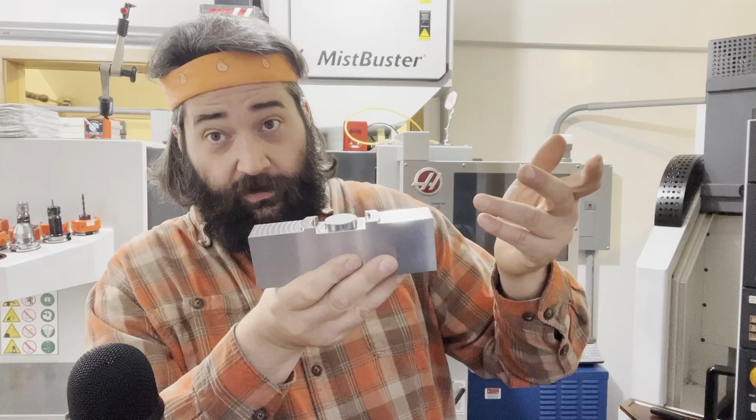So you might ask, what is a shallow diameter? It could be an inside or an outside diameter, but the core theme is the length of the diameter's land is too short to measure traditionally. So this outside diameter with its 100th thou length can't be measured with a traditional micrometer.

And you say, well, a caliper could get on there. Yeah, but if you're trying to hold seal fits or bearing fits, a caliper really isn't what you want to be using. And then on this inside diameter, there's an embossment preventing something like a traditional plug gauge from being used. So a shallow diameter gauge can measure all three of these diameters, no problem.

And it can also do some things you wouldn't think about, like tapers. It can measure face and taper contacts, like on a lathe chuck. It can do grooves, both face grooves and OD grooves, and it can do all kinds of lengths - really a very universal type of gauging, and I wouldn't want to be without one.

So I hope you get something from this video. Let me know. So here is the gauge I drew my inspiration from.

This is a Federal shallow diameter gauge. They're no longer in production, but my past employers and I have all liked these so much, I've actually made quite a few reproductions of these.

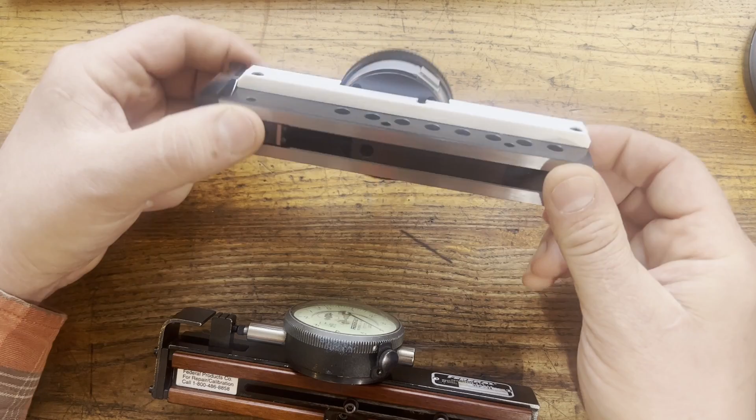One of the things I've discovered is that this slot that runs the length is a liability in terms of getting this bottom plane flat. So when I made mine, I got away from the slot, and instead I have a through hole with a tapped hole on the opposite side, and then the carriage is slotted. So the carriage can still be adjusted, and then you just tighten the screw to locate it.

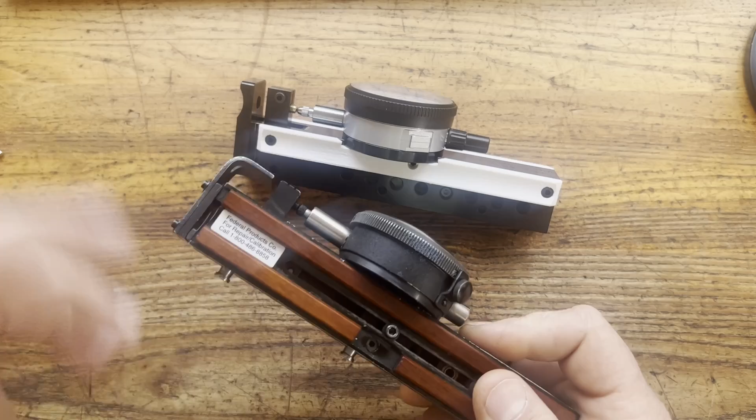My other issue with it is the carriage floats a little bit when you go to lock it up, and it can make setting the probe depth a little challenging if you need to hold a very specific depth. Sometimes you might have a counterbore as shallow as a millimeter, and so if your carriage is floating around half a millimeter, that could be a little frustrating.

And then my final issue with it is it takes 2 Allen wrenches to both adjust the carriage and the probe height. So on mine, I unified everything to one 2.5 millimeter Allen wrench that handles all the adjustments for the entire system.

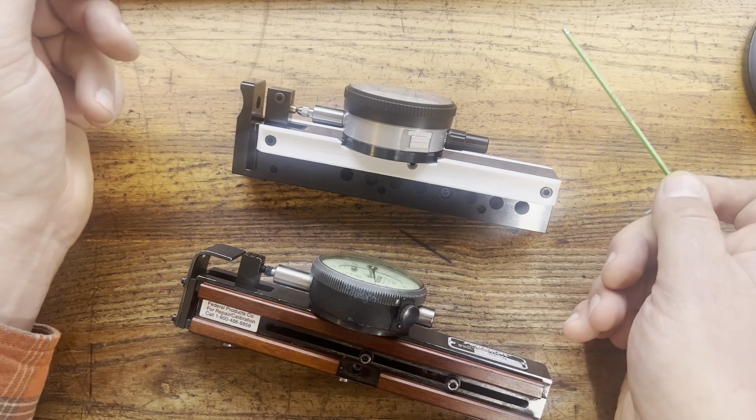Otherwise, it's just a few DFM things. Instead of a stack up of 3 basic plates, I went with one more complex one. With the advent of CNC, lower, more complex part quantities I find to be easier and cheaper than lots of little simple parts. But it really kind of depends on your shop - if you're a manual shop, maybe this makes more sense.

But yeah, otherwise, very loosely inspired. Another thing I changed - instead of the wood insulator grips, I just 3D printed them, and if anything, the hollow infill nature of 3D prints makes for a pretty good insulator. On top of that, I think it looks pretty sharp too.

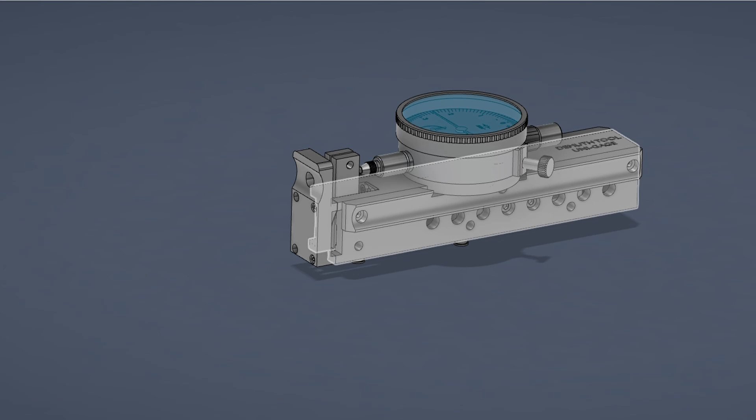This is the CAD model for the gauge. We're going to take a look at each piece and briefly see how we manufactured them. We're going to start with the main frame of the gauge. So if we take a look, it's pretty prismatic, just a lot of holes, and then the only thing of note is this T-slot. We did have to hard cut that feature, and hard cutting T-slots is a little tricky, but it works well enough.

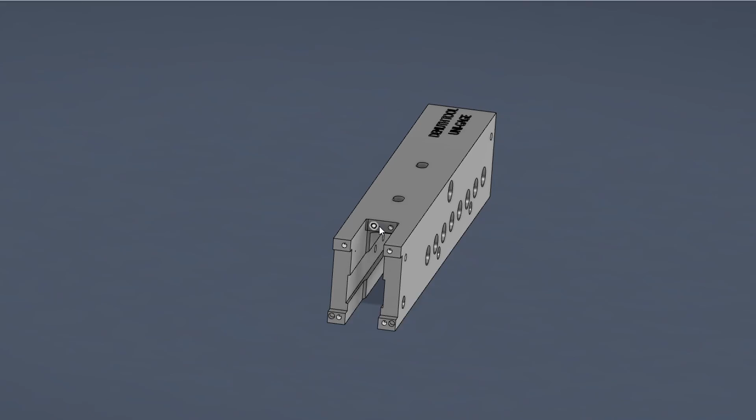The only design for manufacturing issue I had is this M2 screw hole, which was too deep for my traditional thread milling solution that I used on the top M2s. So I did have to hand tap that one. Otherwise, pretty straightforward. I gloss over the grinding of it because we established in past videos how to grind things flat and parallel, and so I just really wanted to quickly focus on the hard milling and things you can do, like try to avoid deep holes like this.

This is the M2 tap I was talking about, having to hand tap. Had I got this from a customer's engineer, I'd complain all week, but since I designed it, it wasn't that bad.

Just a quick look at grinding this up - again, just kind of wanted to gloss over it. I used the same technique I used for the thin V block. This is the hard milling. I had to do it in the Haas since it is slightly too long for the Mori, but I'm using a step down technique with a back tapered end mill. And so even a machine like the Haas can still deliver pretty good results because the cutting pressure is so uniform.

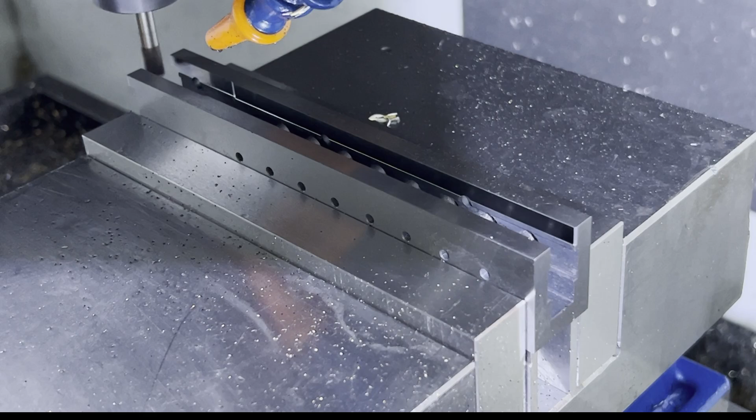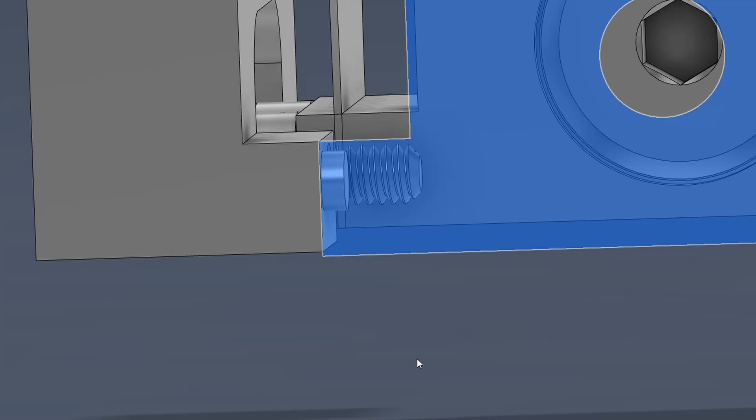For the gauge frame, some of the fits we have to be cognizant of is we don't want this end cap floating around and sitting lower than the bottom face. So how we prevent that and keep this slightly above is we hard milled two 2mm dowel holes into the frame, and then on the end cap we have two 2mm posts, which are H7 and fit into that dowel hole.

That just keeps everything aligned. Some of the other fits we have to worry about is we don't want this flexure spring here being out of perpendicular to the face of the part. So how we keep everything nice and squared up is on the frame, we have a slight slot that the flexure spring sits in, and it just slip fits into there, and that keeps everything aligned pretty accurately.

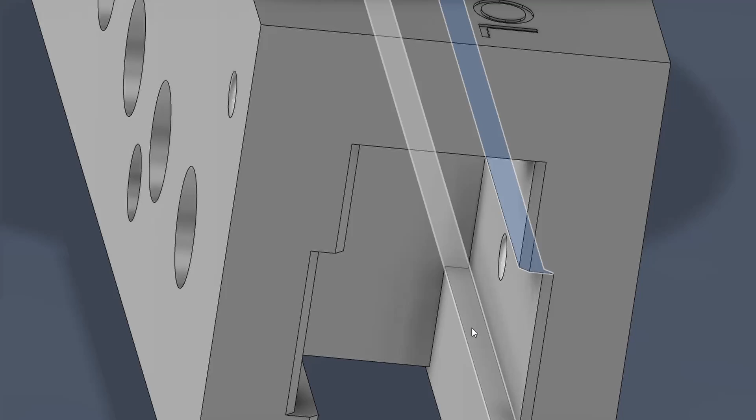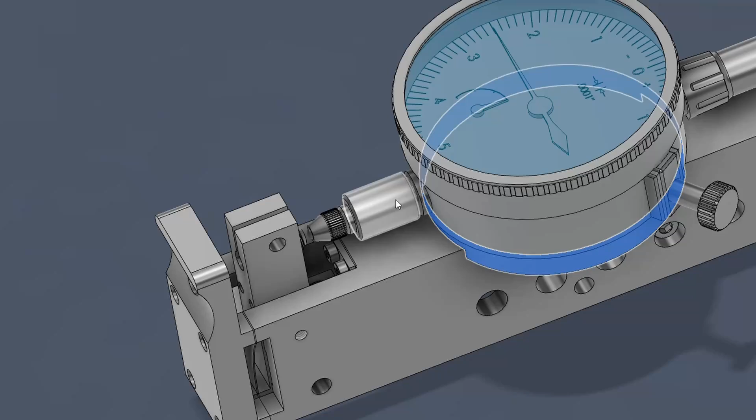Same goes for the contact moving carriage. We have a 5/10 gap between this face and the carriage, and we also have the widths at 5/10 over gap, which gives you a nice running fit with minimal wiggle. And then also we have a slip fit between the gauge and the indicator adapter, because we want the indicator, if we have to adjust it, to maintain perpendicularity to the contact. So that's the gauge frame.

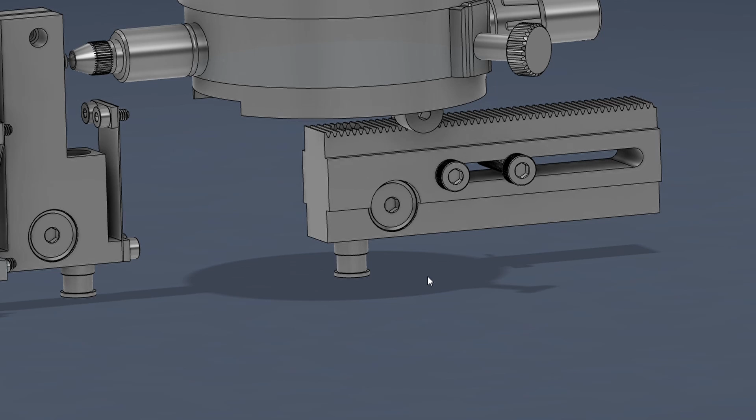Moving on from the gauge frame, we can look at the adjustable carriage and then the floating carriage. On the adjustable carriage, we have this gear rack and a small brass gear, and a 2.5mm Allen wrench goes in and makes this move side to side, and that's how we set the position of this fixed contact. So the gear rack, we'll mill that in, and we'll also mill the brass gear, and then that gear is held in place by the indicator mount and a small pocket we milled on the gauge frame.

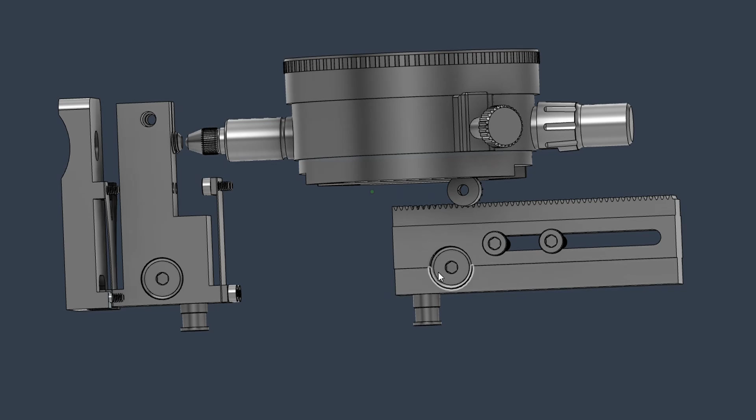So I thought that was kind of a clever way just to keep that gear in place with minimal hardware. And the other thing to note on the carriage is I wanted a low profile way of securing the probe from the side. So what I did for that is I just have these two discs with a chamfer on it, and when you torque the chamfer, they lock up in the bore they ride in. And that works pretty well - it allows side access, it clamps very securely, and so that's the fixed carriage.

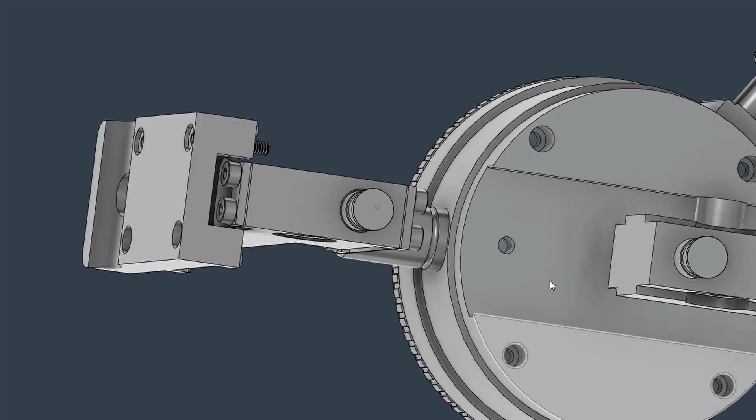And then over on the floating carriage, same implementation, just a 6mm hole, and then these two discs with a chamfer to lock everything up. More 2mm holes - these are all a lot easier. And then I made two holes through here just to make assembly a little easier - you could pass a wrench through and secure these. And then a set screw with a slit and a locking screw to secure it for adjusting the zero on the indicator. And those are the carriages.

And then the flexures, they get milled from shim stock, spring steel shim stock, using a super glue method a watchmaking friend Josh Hacko taught me. So we'll go over that too.

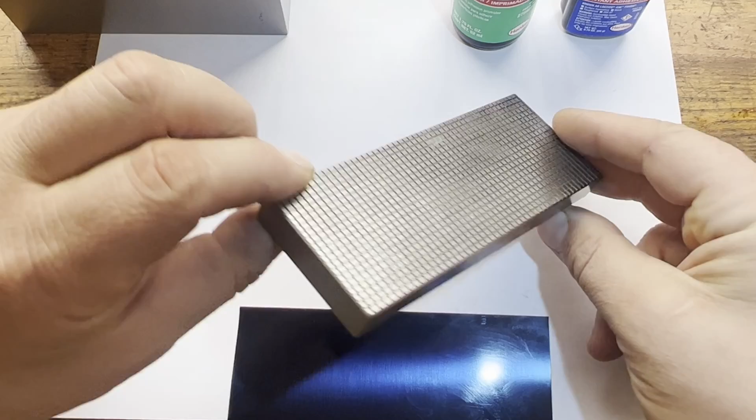This is the super glue work holding technique. It starts with a pallet that has some V-grooves grooved into it on a fairly tight pitch. Mine's 2.5 millimeter, but Josh actually goes a little tighter on his. So you prep everything clean - I've had to deburr my shim stock material. Now I'm just priming it.

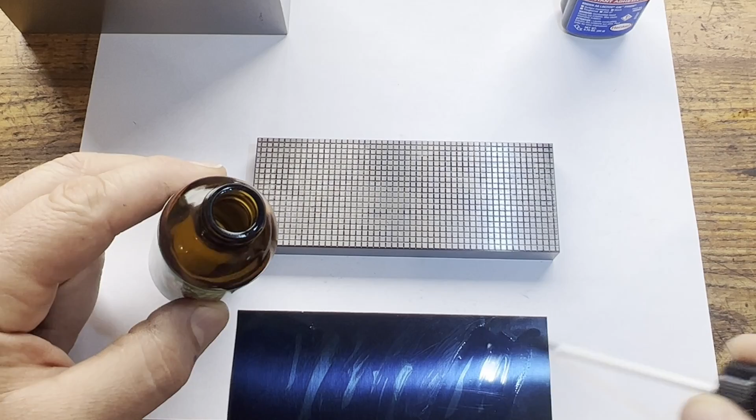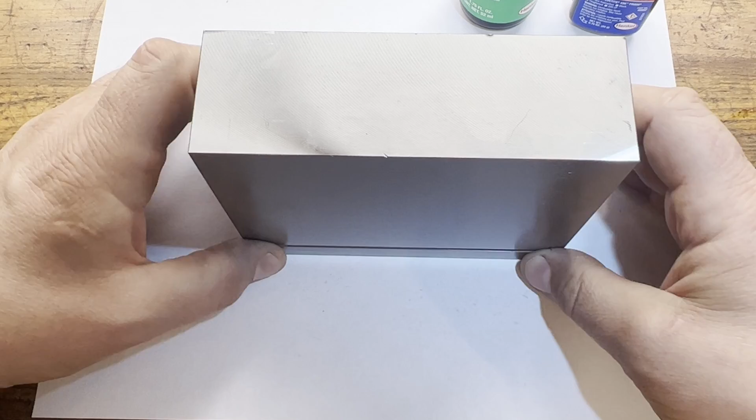And you'll just put down a pretty large layer of glue. What happens is the grooves - the excess glue pours into the grooves - and it gives your part very intimate contact with the top face of the pallet, yet the grooves allow enough glue to still hold it securely. So you don't get uneven parallelism like you would without the grooves. So just kind of seat it, put some weight on it, and let it cure. I let it cure overnight - I'm in no hurry. So the next day, we could start machining.

So we're just using a 1.5 millimeter end mill at 24,000 RPMs, interpolating out all the screw holes. And then we'll do some 2D contours to cut these out, stepping down 0.1 millimeter at a time. I should say this is a 10 thousandths, or 0.25 millimeter thick, blue temper shim stock.

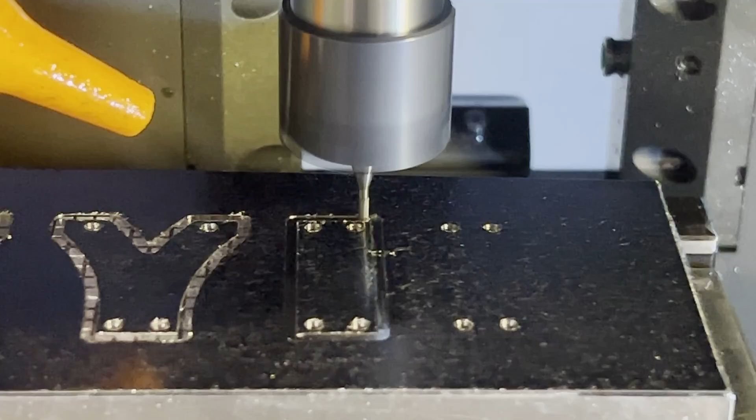After the machining is finished, we'll submerge the pallet in some acetone for up to a day or two, however long it takes, and that'll demount the parts and the extra sheet material from the pallet. The grooves also give a route for the acetone to enter underneath the sheet, so it demounts a little quicker than a part without grooves under it.

This is the machining process I'm using for the circular clamps. I part them off, send them to heat treat bundled so they don't get lost in the oven. Then post oven, I'll grind the chamfer on. It's about 50 thousandths deep when turned on its side, and I'll just plunge that down, move down a few more tenths, and walk the wheel off. That produces a pretty nice finish, and it won't pump a lot of heat into such a small, delicate part.

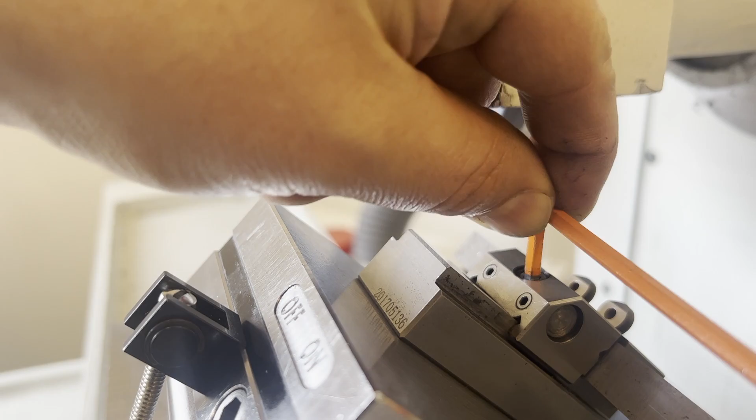Using the same part-off method for the little clamps that secure the flexures. Then doing a little bit of cleanup. A little bit of the tab is still on them, so I'll use some low-profile side cutters to remove it, then do a little manual deburring, and stick them on the surface grinder to remove what's left of the tab.

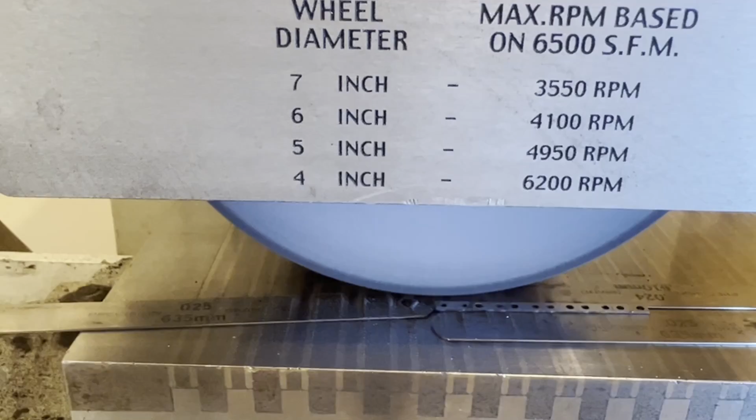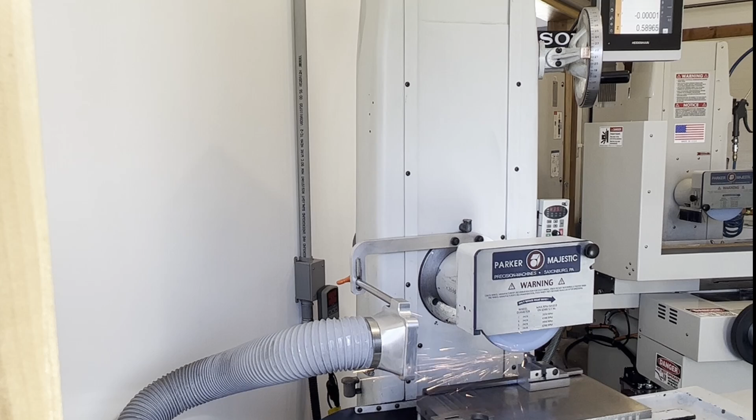Oftentimes on small parts like these, only a few surfaces really need to be precise, but it would be in poor taste to leave the remaining surfaces unground. It wouldn't look all that great, so you want a way to quickly remove the material and put a ground finish on these surfaces. What I use is called peel grinding, where you can take up to a 5 thousandths cut without much penalty.

I've established the top of the part, and now I just have to figure out where the rear corner of the wheel is. I'll test cut up against a shoulder, measure it, and adjust. Once I have the wheel located, I can follow the path of the part like a 2D line, almost like a lathe would, and produce very quickly a very acceptable looking part. The thing with peel grinding is you can't take a very wide stepover - it's usually about half a grain. I'm running a 60 grit wheel, so that might be eight thou at most. I'm taking about five.

Test cutting for the rear corner of the wheel. Now I'm moving into position, and I'll zero it, so my wheel is located in two axes. You can see I'm at 99.5 thousandths. Once I get to my desired target on the cross feed, I'll feed down to 100 thousandths, and now I can start feeding out, taking a relatively large peel cut.

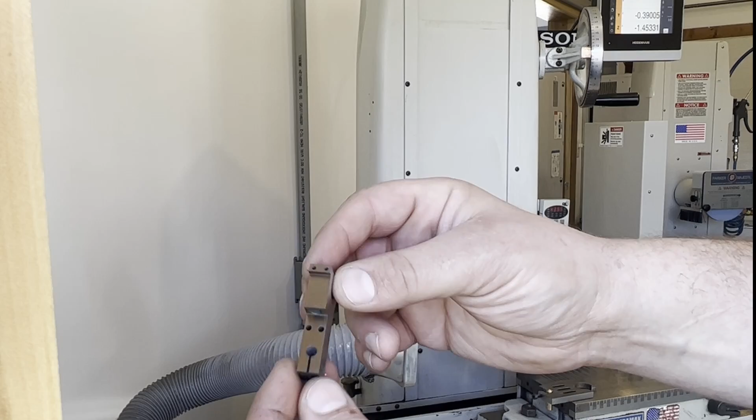Now I'm finishing the holes for this. They're two 6mm holes, and we're just hard milling them in, and we'll fit them with the Deltronic pins. We're shooting for about a tenth under nominal, then we'll lap that last tenth out of them. This machine can generally interpolate around a tenth, and that's pretty darn good in my opinion, but if I want a smidge more accuracy, I lap.

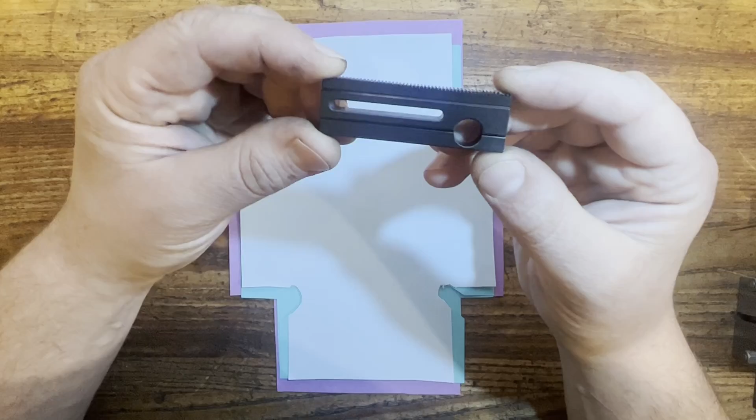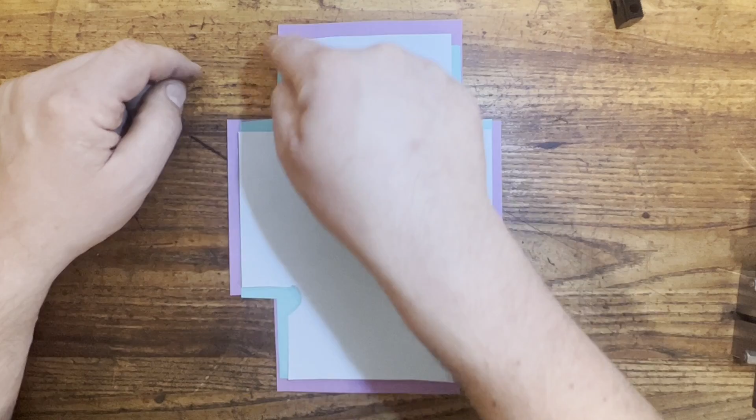Now we're doing the larger hole that the clamps sit in. For grinding the carriage, I made this little construction paper cutout to show the process we used to get all these features cut in. The center powder blue cut shape is the final part shape, and the perimeters are various levels of stock. As it comes from heat treat, we have a 5 thou curtain of stock all around it, and we need to remove that and put in these corner reliefs.

So we'll start by squaring up the top and bottom, and then the sides. Now those sides are out in air, but we still need it to be square because we're essentially using the part as its own fixture. So we'll get that squared up, and now we have something like this. Basically the corner reliefs and the L shapes are the only things with stock left.

Once we have that, we could tilt it on a 45 and install the corner reliefs with a V-shaped wheel - that's really not too complex. After that V-shaped wheel puts in the corner relief, we have something that looks like this. Just the flats of the corner cutouts need to be removed yet, and to do that we can do it directly on the chuck, no fixture needed, and we just come in with our wheel and touch and move over, working from the corner out.

And that's how you'd grind something like this. It's not too bad when you take it one piece at a time, and then you're left with your final part shape.

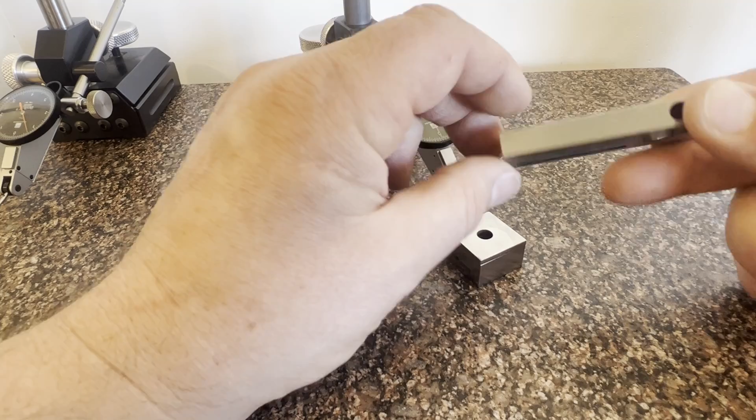This is a brief explanation on how you gauge something like the T shape that's going into the undercut slot. So you need to hold a pretty fairly accurate dimension on that because of the clearances we're running, but you see that the micrometer is kind of an inconsistent way to do it. It tends to rack a little, and you see a little variation in measurements if you do it enough times.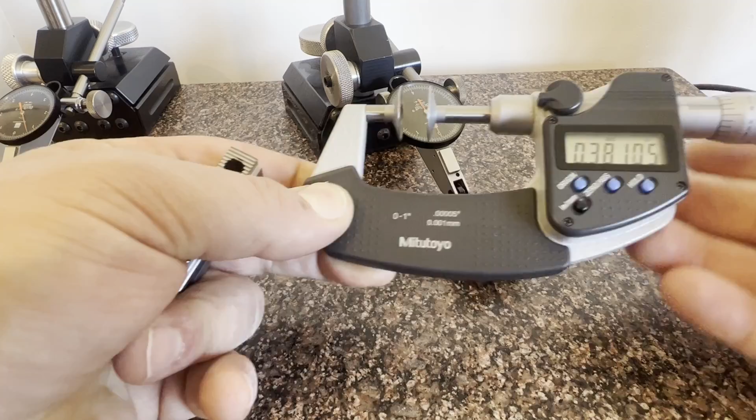So I was getting about 1/10 to 2/10 under 3/8. You could also use something like a disc micrometer, but I find them even worse. So what I do is I measure the position of the one side, and we're about 1/10 over the nominal size to the CAD model. So I just kind of make a mental note of that. And we're also kind of checking parallelism of each feature set to the other.

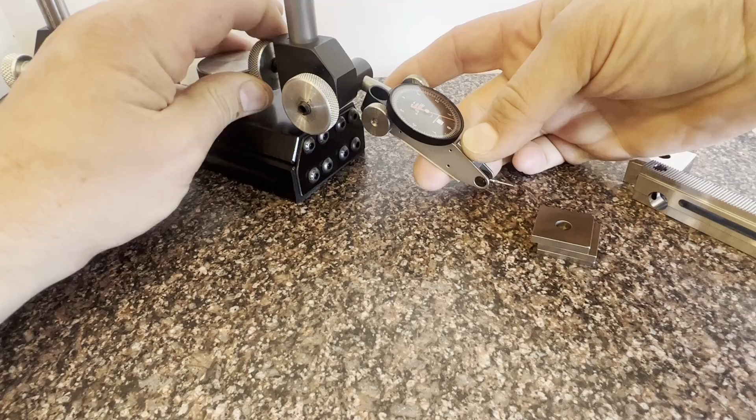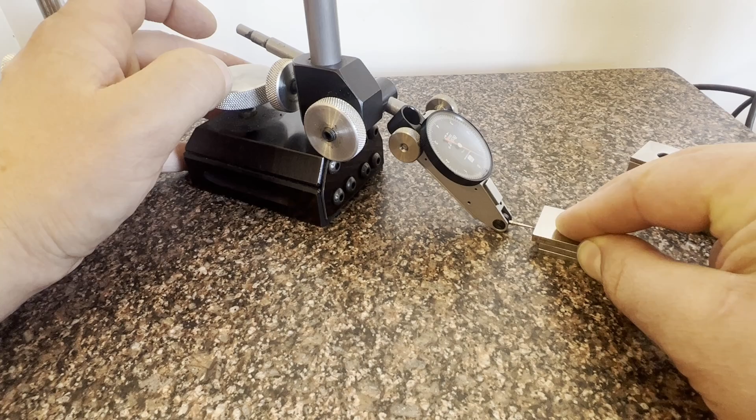And now we're going to do what's called up gauge, and we'll be measuring from the underside. To do that, you just put an additional gauge block on top of your stack to create a ledge, and you set your indicator to that. Unfortunately, I have the dial kind of at a bad angle to the camera, but you get the idea. So we zero out our gauge block stack on the underside, and now we check our part that same way.

So if we just barely see, looks like we're about 2, maybe 3/10 less stock than nominal. And so with that 10th extra stock on the other side, that means we're about 2/10 under 3/8, which is kind of in line with what the micrometer was reading. But that's just a little more sure way to do it.

Now we're making the small brass gear, which we use to adjust the carriage. I don't do much gear milling, and I don't get to play in brass much, and I had a lot of fun with this one.

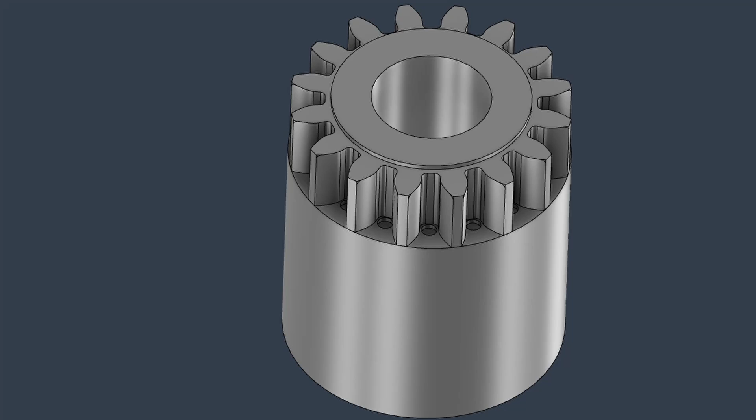So I helped out the small tooling I was going to be using by drilling out the root of the gear. I used a 0.3 millimeter drill, and that reduced some of the cutting the 0.3 millimeter end mill was going to be doing later on.

So we rough with a 0.8 and then finish with the 0.3. Those are just what I had on hand. Wasn't ideal, but worked out fine.

The 0.3 millimeter end mill is a 10 times diameter tool, which is unfortunately long, but it survived just fine. I had it in stock from an old project and wanted to use it up.

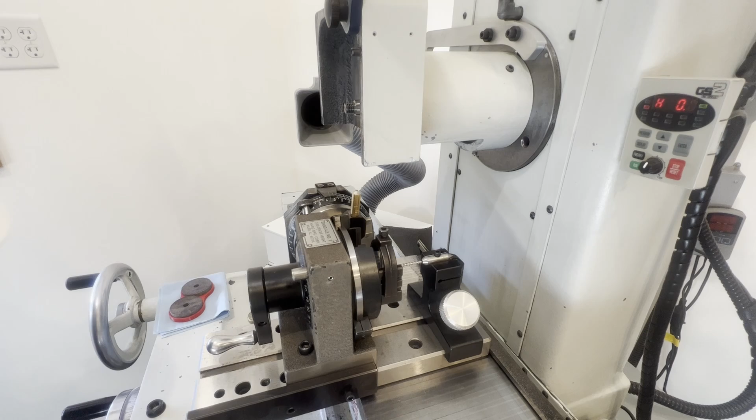So now that I have the relief in, I'm switching wheels to 100 grit, and I'm going to put a 5-degree angle on the bottom, and this is going to be the relief angle on the cut edge. To put the angle on, I'm using my Newbold dresser.

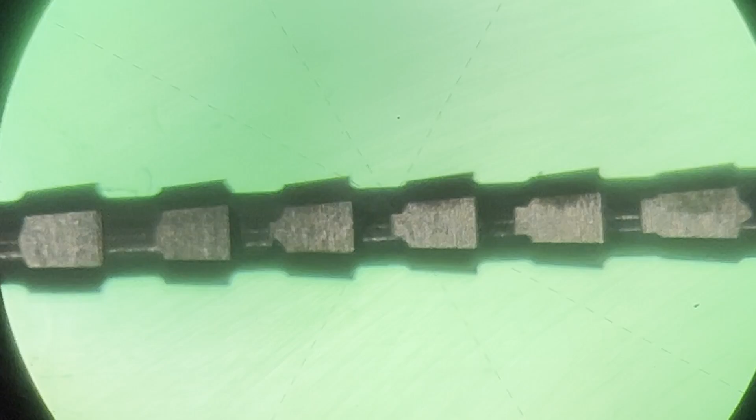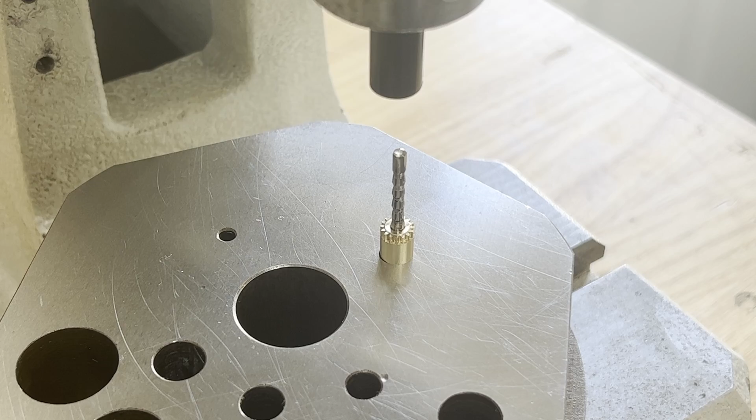So I'm just lubricating the broach the best I can, and then we'll give it the old heave-ho. It sailed through beautifully, but each progression of cutting land is only taking a thousandth, so you wouldn't expect a lot of resistance. And then just to get the last little bit through, I have to tap it with a punch.

So my lack of foresight here was regrettable, but all's well that ends well.

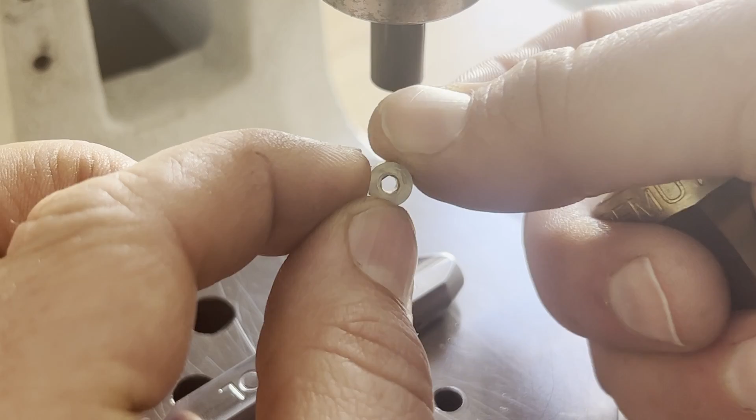Just doing a quick test fit, and I'm not gonna lie, that made me smile. That was a pretty neat little assembly. Gears I don't get to mess much with, so I enjoyed that.

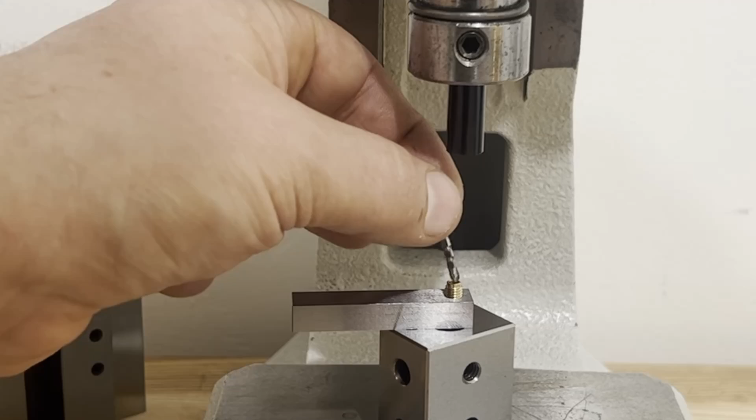Now I need a brass set screw. I thought about just modifying a regular set screw to hold a carbide tip, but I thought holding it could be a bear, and I thought just as quick I could make one. It only took a few minutes to machine, and then I pressed the broach through it.

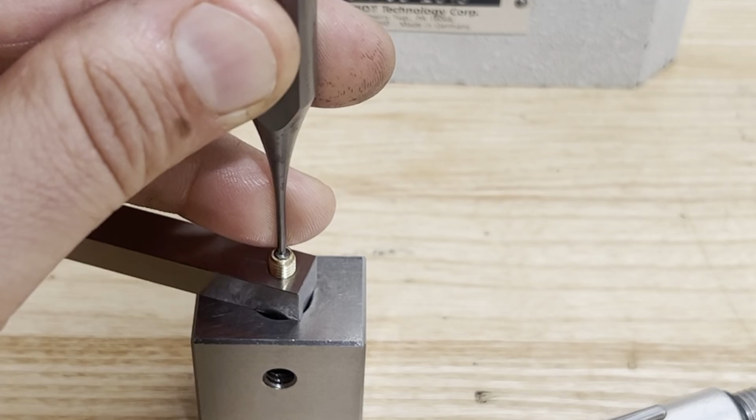Now I'll tap the broach out, put my carbide ball in, and press that in, and then I'll grind the face of the carbide ball down, and that'll be the indicator contact point.

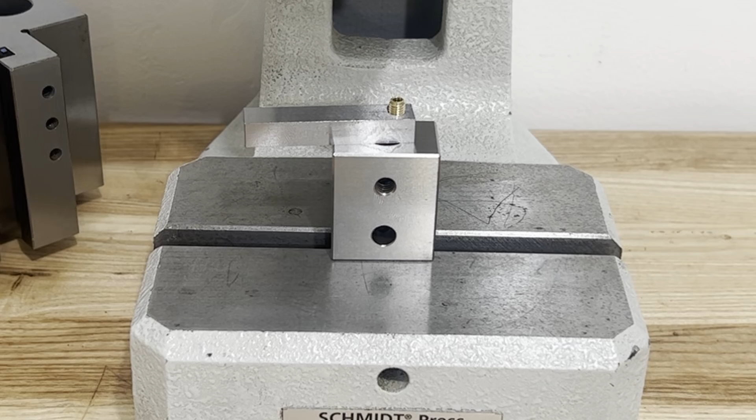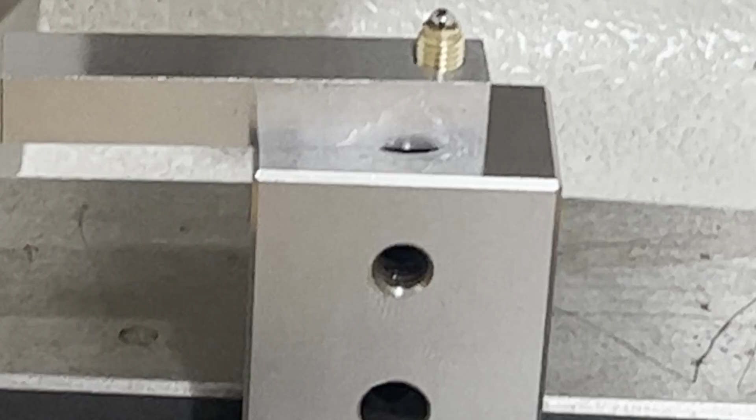So this is just a 3mm C2 carbide ball, and then I have 25 microns of interference fit on it. And then I'll grind about 0.5 millimeter off the tip just to make a nice flat land for the dial indicator to push against.

So we're getting near the finish line with this machine work on this project. Right now I'm doing some engraving. The gauge bodies and then the 42 and 52 millimeter setting standards all need engraved.

When I hard engrave, I use the word engraving loosely. I actually just model the geometry and treat it like 3D contour milling, like it's a mold insert or something. That's just something I've learned having cut enough coining inserts on dies. Really, really hard tool steels don't often work well with the typical tracing style engraving tool paths. So if you treat it like 3D geometry and approach it that way, you get really nice results when hard engraving.

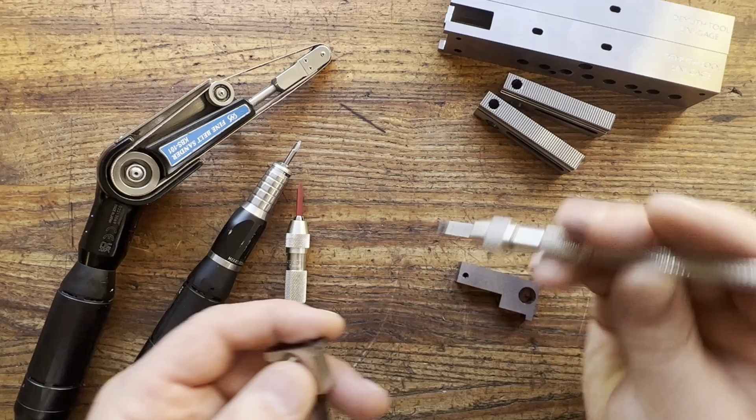Now we got to do some last minute deburring. It's going to black oxide after this, and if you don't have all the burrs off of it and you try to take them off after black oxide, it's going to look really, really bad. So just take your time and go over everything that's getting coated or oxided, and make sure it's fully deburred the way you want it.

So I'm using a ruby just to make sure where these two holes intersect that there's no sharp edges that anything can hang up on. Once I've gone through and massaged all those edges, I'll smooth over the corners of the chamfers and the crowns with the belt grinder. I'll just take about 20 minutes and go over everything, and then it can go off to black oxide.

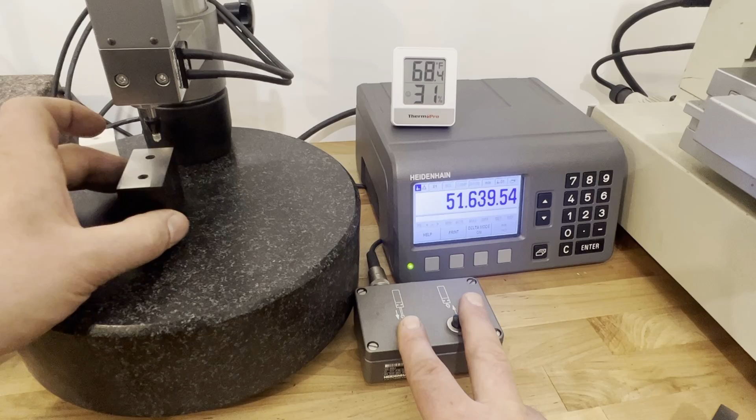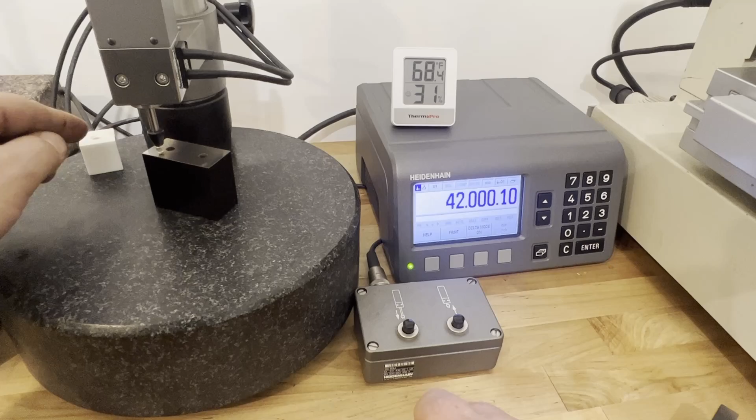So everything is back from black oxide now, and one of the things we need to do post oxide is grind the final lengths in on the setting gauges, so 42 and 52 millimeter. I was happy, my goal was to get it under a half a micron of deviation, and we got that. Now the ears on the end of the gauge have to be coplanar on the top, so I ground them as an assembly.

Just to make sure it never gets unassembled and knocked out of coplanar, I'm going to put a little bit of super glue in the cap heads. If it absolutely has to come apart, that's not a big deal, you can pick it out. But it just kind of says, hey, what are you doing?

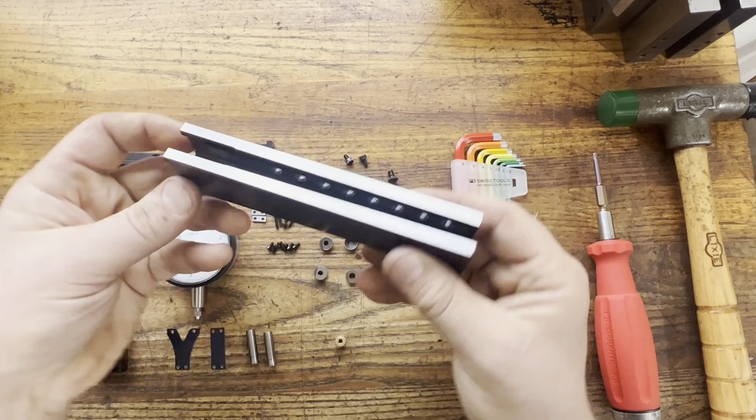So now we are on to the final assembly. This part's going to be pretty long, about 10 minutes. I won't be offended if you skip through it, but I just kind of wanted to let it play out. I spent a good long while on this project, off and on. I got parts into the machine when it made the most sense and batched stuff up with my regular heat treat, so the project was around the shop for over a month, which is unusual. It just felt right to kind of take my time with the assembly and the video and let it play out.

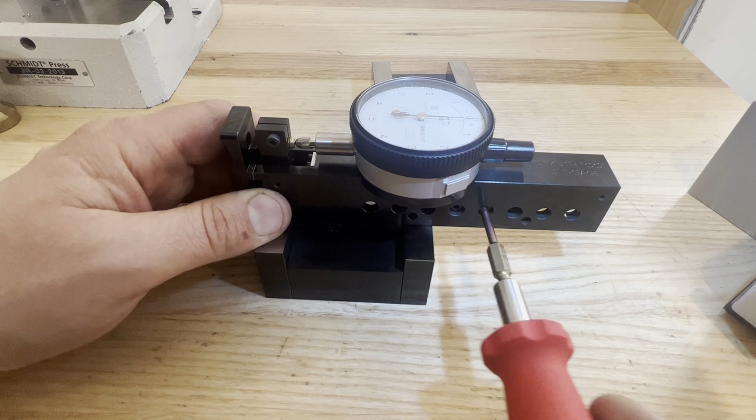Unfortunately my phone cut out before I could set the brass screw to zero, but now I'm setting it to the 52 millimeter gauge, and we'll do that by adjusting the movable carriage. This is my first time adjusting this, and one of my design regrets is the carriage actually moves a little too freely, so you'll get it where you want it, then go to lock it up and it'll wiggle off location. I think it maybe needs like a rubber brake or something to give it a little bit of resistance to movement. It's just too free moving and jumps around, but the amount of disturbance from lockup when you tighten the screw is very minimal, so I was happy with that.

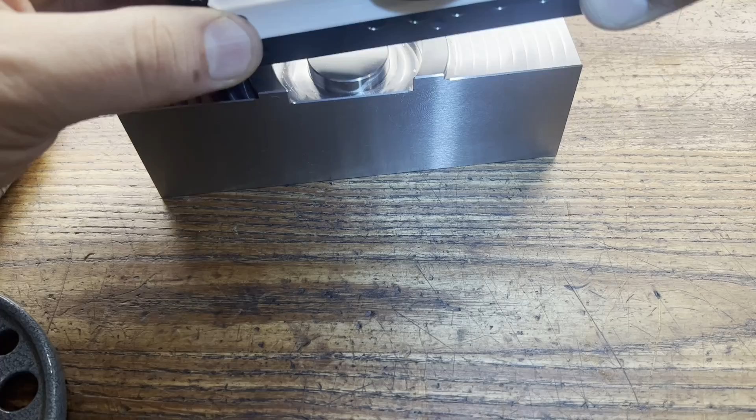Alright, so the gauge is set, and I've machined up a little demo part. We'll see how it works. You rock it to find the low spot, that's where you set your gauge to, and then you compare that to the part. As we can see, our part is about 6/10 over the gauge.

Alright, if you guys made it to the end, I really appreciate you watching. This was a fun customer project, and I was happy to be able to make it into a video. It kind of lifted my spirits. I was in a little bit of a funk after IMTS, a lot of the same repetitive work, and so I really enjoyed this. And here's the 3D printed gauge I talked about.

I wanted to go over this before signing off. I'm not really going to share the CAD files for this because it really kind of comes down to what indicator you have and the indicator mount. Because of that, if you have like an Interapid and whatever mount, it could be wildly different in proportion than the setup I have. So I'm just going to kind of share my thoughts.

I use 3 rods, 2 of which form the base, and then the third rod is just for the indicator to mount to. That chassis concept works well enough. And then on the bottom, I have 2 ball bearings pressed in on this side directly underneath the rod. It's actually pressed against the rod, and that's to try to give as much stability as possible.

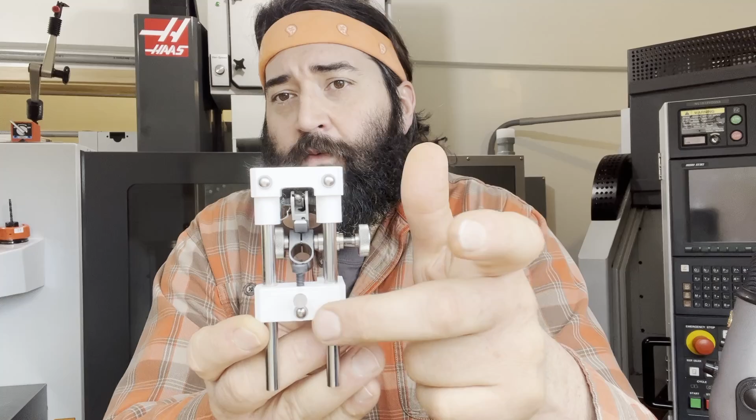And then 1 on the rear, and then the rear fixed contact is what's called a toolmaker's ball. If you search on McMaster, you should be able to find that. And then I ground off about 30% of the tip to give it kind of a little bit more ability to enter into a shallow bore. Now, I said no machining - I used my surface grinder, but I think you could probably get away with a belt sander or a bench grinder if you had the patience.

And then you basically use the indicator mount to fine adjust the depth and position of the indicator needle. Maybe one with a flexure cut that you can creep up on it would make life a little easier, but I kind of wanted to use like a worst case scenario. I wouldn't want to hold tenths with this, but if you just need something to confirm a dimension, I like this better than a pair of calipers.

And it's, I don't know, kind of a neat little thing to make. So yeah, if you ever need one, just see what you can print up. I was surprised how well it worked.